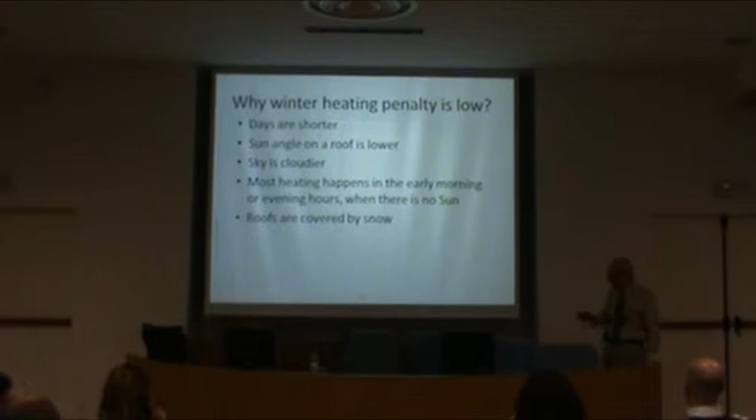So at this time, we are about 5 years ahead in our research. We are now satisfying many communities that cool roofs, white roofs, lend themselves easily to commercial flat buildings that nobody sees the rooftop of anyway, so why not use them? Then we show them some pictures of very high-class buildings that are white and very attractive.

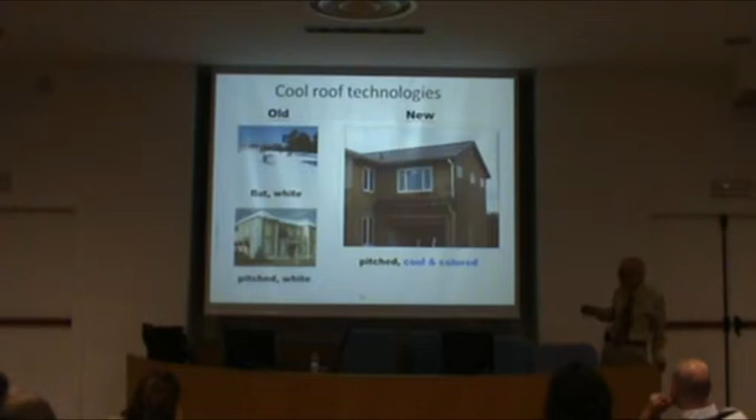Still, people, because of architectural aesthetics, would like to have color on the roof. At that time, we came up with the idea of making cool color roofing materials. This is an example of a cool color roofing material that we installed back in the early 90s and tested the performance. So what is a cool color material?

About 43% is visible. We define color by the performance of these surfaces with respect to this 43%. Over 50% of the sun's energy reaches the Earth's surface in the form of near-infrared that's not visible to the eye, so it doesn't affect the color, we do not recognize it, hence the definition of the cool colors.

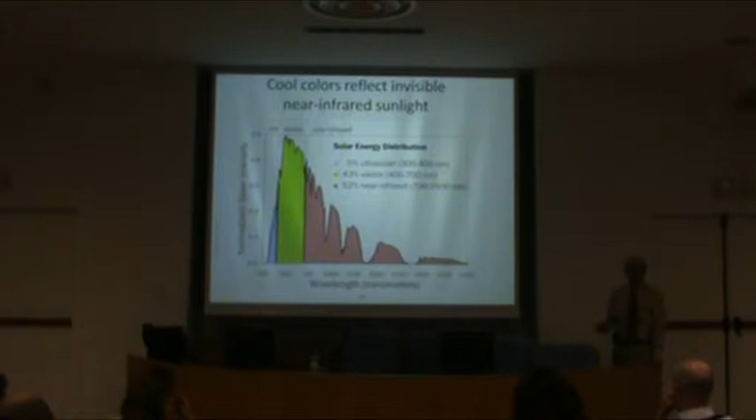So we put a goal for ourselves: let us try, at least in the lab, to develop a jet black surface that has an interface reflectivity of only about 4 to 5% in the visible. You all know that because of the change of density of the air and the surfaces, you have some interface reflectivity, calculated to be about 4% for most diffuse and direct radiation. So the jet black surface absorbs all the visible energy, but we would make this surface 100% reflective in the near infrared.

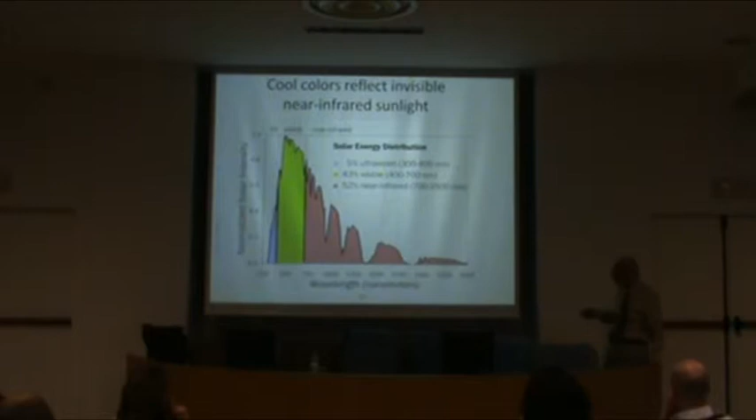Now, by definition, we have defined a jet black surface that has 50% reflectivity. Most current colored materials are not even approaching 20 or 30% reflectivity. Now we are designing a jet black surface with 50% reflectivity. And indeed, this is an example of it.

Two browns designed to have exactly the same colors. When you look at the spectral properties of them, in the visible, as expected, they are identical. But in the near infrared, the one designed to be cool reaches gradually to about 80% reflectivity. The standard one is around 10%.

So on the net, the solar reflectance of this surface is about 8%. This one is 27%. If you put these under the sun during a hot summer day, this surface is going to be 10 degrees Celsius cooler than the other.

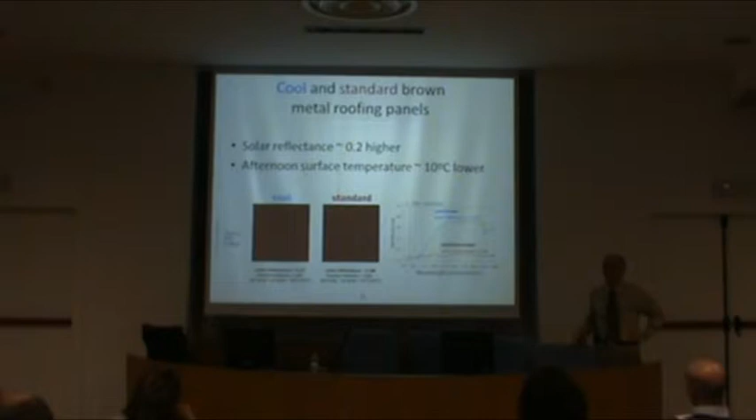And here is the beauty of these things: some manufacturers were using these materials, and we didn't even know that they were using them. So when it comes to black, which is being used in many applications, particularly in Southeast Asia, they have black roofing tiles.

We tested the performance of a particular coloring agent, called dioxazine purple, in very diluted amounts - it is purple, but once the concentration passes about 3%, it becomes black. We applied it on 4 different backgrounds.

One of them was on a metallic aluminum background with a reflectivity of almost 70%. One of them on a very thick white background. One of them on a thin white background. And finally, one of them on a black background.

As you see, the color of all of them is black - they are designed to be that way. And when you look at their spectral performance in the visible, they are identical.

But as soon as they approach the near infrared range, note that the one on an aluminum background stays at high reflectivity, as much as 95%. On a white background, it peaks up to about 90% but gradually drops down. On a thin white background, they peak up to about 70% and then come down.

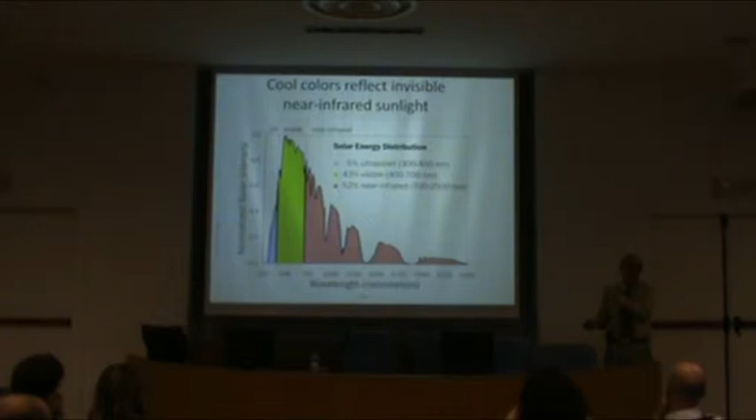Remember, when I was defining this, I said let us design a jet black surface with 50% reflectivity. Now we are having a black surface with 42% reflectivity. So this is a time that most of our group pat themselves on the back saying, good job - so let us go and get more money to do more work.

So then, is this research only being done in the lab? That has not been our motivation in my group when I established it. I basically was saying to myself, mostly to my staff, that our success is not going to come by the number of papers that we write. Our success should be calculated by how many kilowatt hours, how many gigajoules we save. If we do that, then we can consider ourselves good environmentalists, good scientists.

So we have never been interested in doing science in the abstract. We have been trying to reach and bridge the gap between industry and science, bringing products to the market immediately. Initially, the material developers were dubious of our intention - they were very secretive. But as soon as they found out that we are the best friends they can ever have, that we are not asking them for money, just asking them to use this technology to expand their market, we were getting a lot more proposals of marriage than we could ever afford.

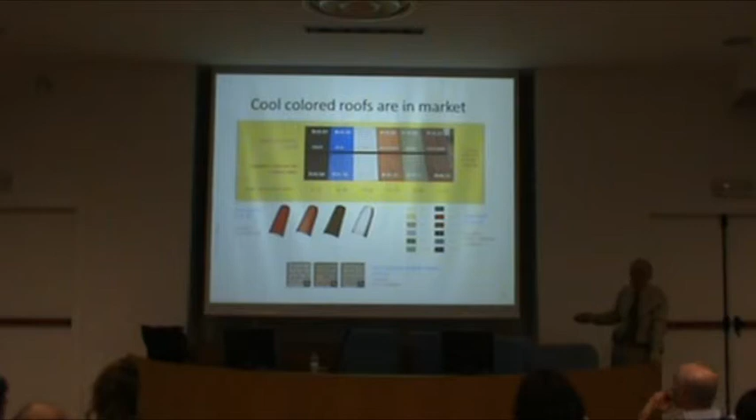Some of you who may be driving or riding a motorcycle know that at the highest speed you need a leather jacket to protect yourself from the wind. But the very first thing you do as soon as you get off the bike is open the zipper because it's so hot out there. Now BMW is manufacturing cool jackets. A little bit expensive, but there's no reason to be expensive because they are only making it unique, and you can also have the arm of the BMW on there, which makes it more interesting.

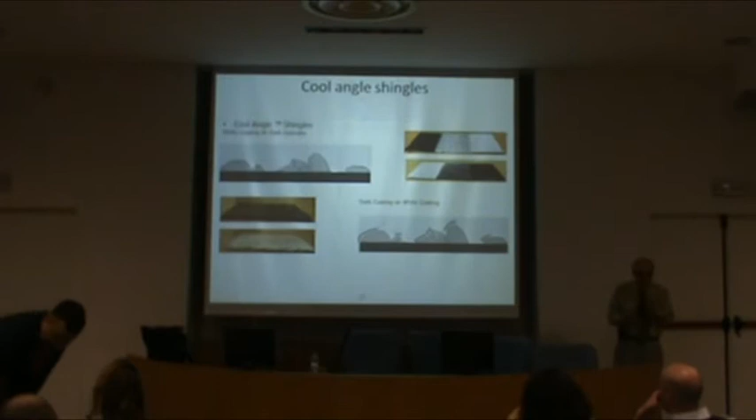More recent technologies coming to market include materials that look dark from the street but reflect the sun. This is called directional reflective roofing material, and these are some examples. These two are exactly the same; one picture is taken from this angle, the other from 180 degrees. So the sun sees this, the street sees this. Therefore your roof is the color you want because it looks like that from the street, but it is a lot more reflective.

The trick behind this kind of technology is to have color pigments only on the directions that are seen from the street, but not on the directions that are not seen from the street.

In addition, there are other products coming, still experimental, thermochromic materials. Thermochromic materials change color with temperature. Most of these materials are organic based, and they lose their potential within a week to no more than 2 months once they're under the sun. So making it inexpensive so that people can use it on the roof is a big challenge.

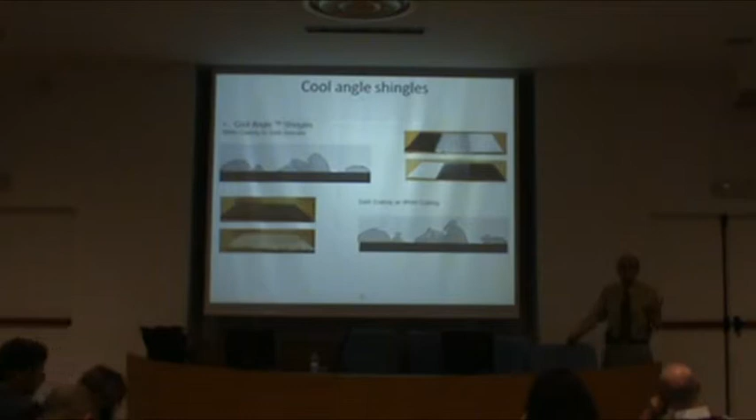Another material that my colleagues in Perugia and other colleagues in Japan are working on is retroreflective material. This retroreflective material, like the reflectors on your cars, reflects in the direction that the light comes from, so it reflects most of the radiation back in the direction of the sun, while from the street level it shows a darker color.

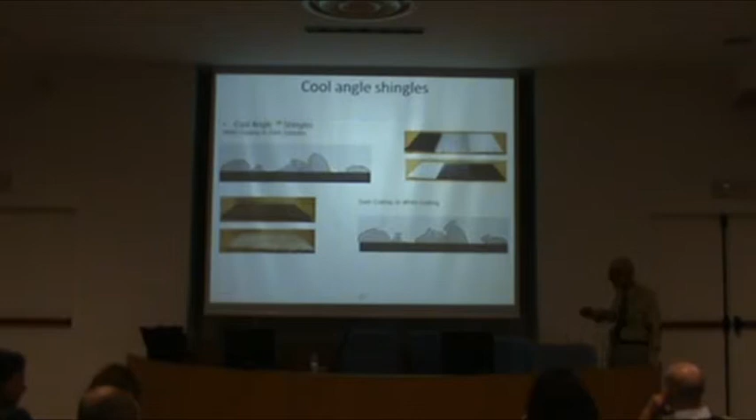Another technology being used is corrugated metals. By the way, these are already available in the market, having come in within the last 2 or 3 years, and we are proud to be part of this evolution. In this design, the vertical part of the corrugation, put at an angle on the roof, is seen from the street, while the horizontal part is seen by the sun. So they are a lot more reflective in the direction of the sun.

So at this point, we have said okay, we are about solving 25% of the urban surfaces. What about pavements? Pavements are a lot more difficult to address for several reasons. Number one, asphalt is a byproduct of the refining process.

Asphalt is a residual of refining, something that refineries have to get rid of. Of course, it does have some good quality, as many residuals do. They found a way to stabilize it and mix it with granules to make all our pavements. Therefore, the pavements installed throughout the 20th century are all asphalt pavement. And no wonder they are

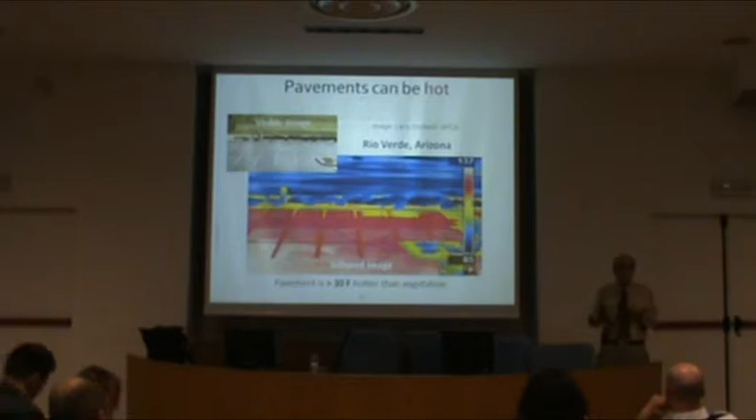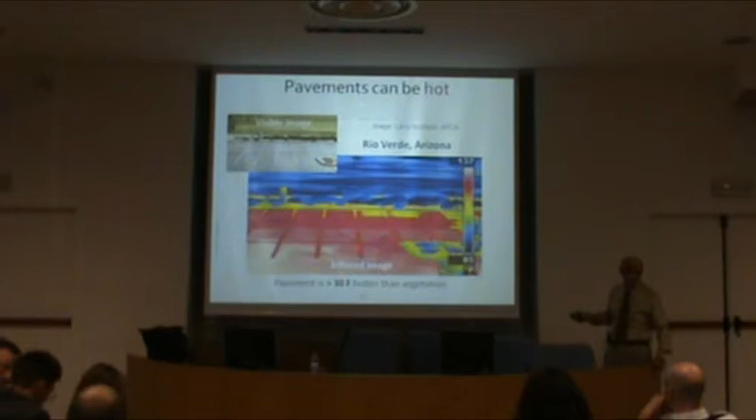Here is an example of a visible picture of an area that includes some grass and some asphalt pavement, with a thermal infrared image. As you see, the temperature difference is something like at least about 50 degrees Fahrenheit, about 30 degrees Celsius. So when the air brushes on the surface, obviously it's going to get heated and it creates a heat island.

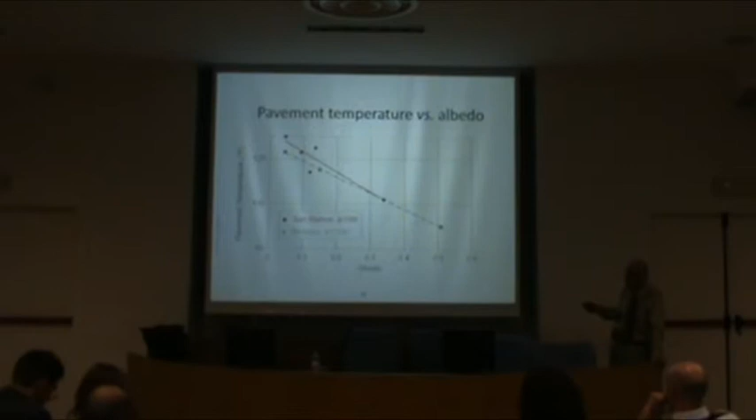So we have been developing some simplified measurement techniques in order to look at the performance of the asphalt. Obviously, the reflectivity of the asphalt would reduce the temperature of the asphalt under steady state conditions.

Principal types of pavements - this is an interesting thing - the word concrete is used both for asphalt and also cement. But when we say asphalt concrete, we are using asphalt. When we say cement concrete, we are using the word concrete. So the correct way is asphalt concrete versus cement concrete.

Many parts of the world are finding out that it is much cheaper to use cement concrete, because of its durability and low maintenance for a longer period of time.

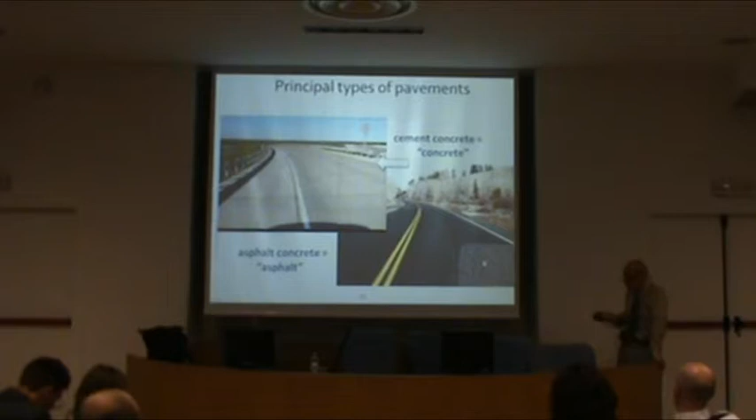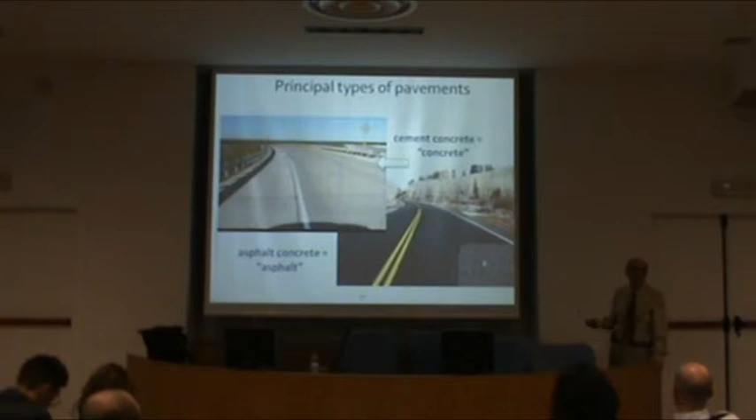There is also another factor that makes this industry very fragmented, very hard to achieve or to make contact with. Asphalt is being applied in many different applications, and each has a different ownership, different policies are required - parking lots, alleys, driveways, bridges, plazas, playgrounds, streets, roads, highways, sidewalks, runways. So airports are in charge of the runways.

You have to reach different crowds in order to convince them to use reflective material. Streets, roads and highways are under the control of the city, municipality, and sometimes the state, sometimes the federal government. So with all of that, it is kind of hard to achieve different progress.

But the technologies that we have reviewed, and I'm going to review this in detail tomorrow, cover a technology called chip seal. Chip seal is, rather than mixing the aggregates with asphalt and then laying them on the ground, we pour the asphalt first, then put the granules on top of it and roll it in. Therefore, if you have a reflective granule, you can immediately have a reflective surface.

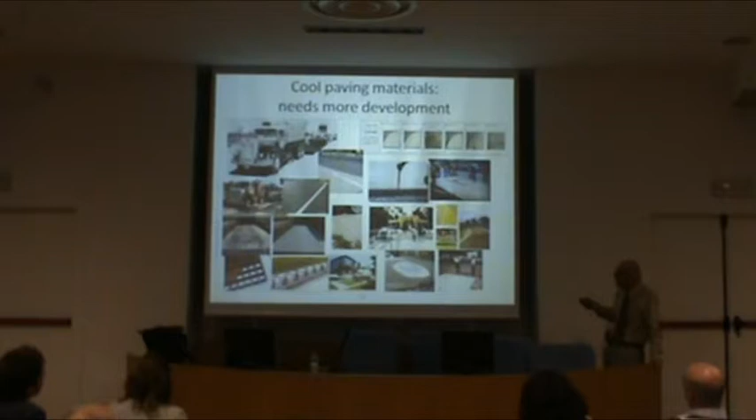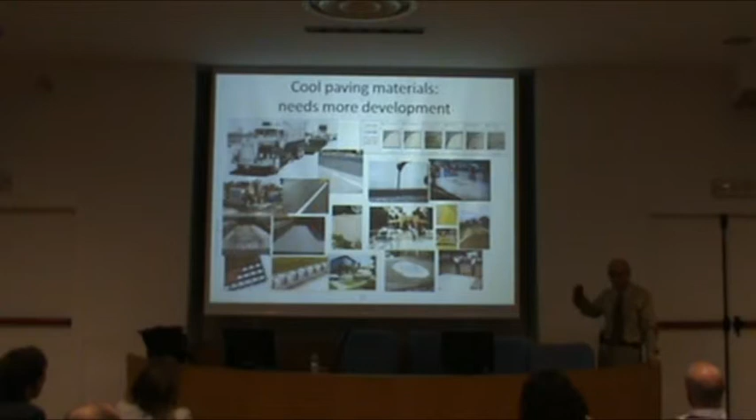You can, of course, use light color concrete. You can use coatings. You can use grasscrete - I saw in several driveways here that parking lots are made from concrete blocks. These concrete blocks can support vegetation growing out of them, and they make these things pretty cool. And then on top of that, you can use colored material as well as porous surfaces in order to keep water flooding under control with this technology.

There have been several studies going on, and my colleagues in Japan, like Rossi and Moriyama-san, have been doing measurements of a sample of different pavement materials, looking at their infrared pictures at one time during the day, and following up their temperatures to identify which one applies for where and when.

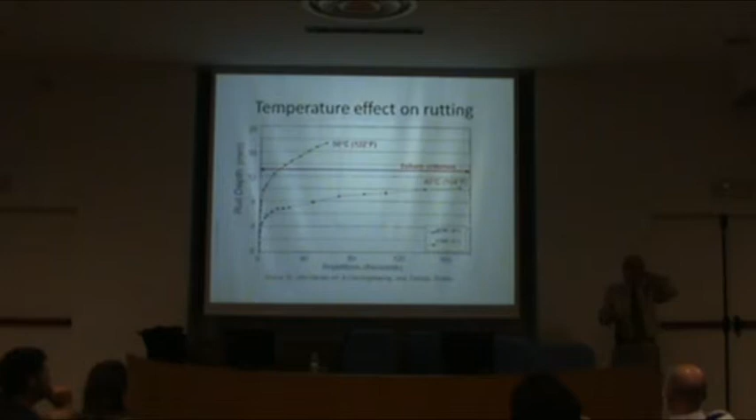Now we have also been studying the benefits of vegetation, and I'll show just a couple of slides on this major area of research. We conducted an experiment where we took large trees from two identical houses, brought them to one house, continued monitoring their performance, then brought a crane and moved them after a month to the next building, continuing to monitor performance. We documented shading savings of as much as 15 to 20% in cooling energy use.

Evaporative cooling: trees, through evapotranspiration and photosynthesis, convert some of the sensible heat into latent heat. It doesn't actually cool the environment a little bit — it doesn't allow the environment to get heated as much. Like steam, it still heats the environment, but compared to the case with no evaporation, it will be heated much less.

Trees are also used in both hot and cold climates for wind shielding. In hot climates, to protect the building from hot wind in a specified direction. In cold climates, particularly from the northern wind, evergreens help. So this is another benefit.

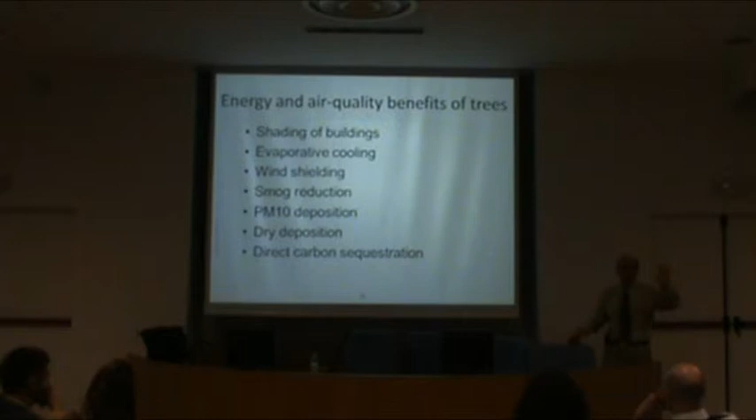Smog reduction: trees, not just by reducing urban air temperature, can also reduce urban smog by about 50%, with the other 50% coming from other benefits. Tree leaves act as a good filter. Particulates harmful to people, particularly large particulates of 10 microns or smaller, get deposited on the tree leaf, and because the leaf is slightly moist, it attracts them so they aren't moved by the wind. When rain comes, it washes them to the ground where they belong.

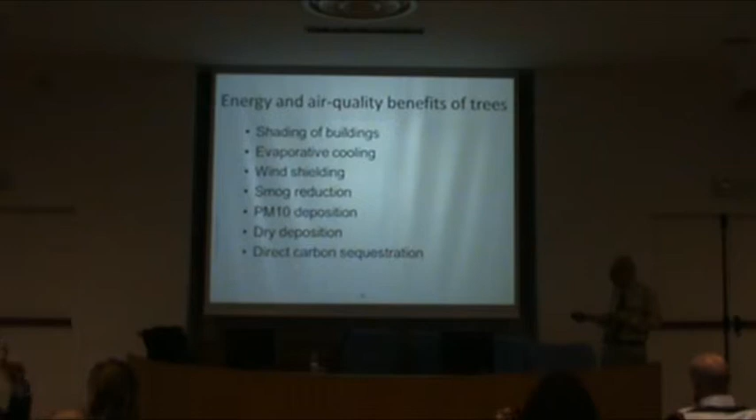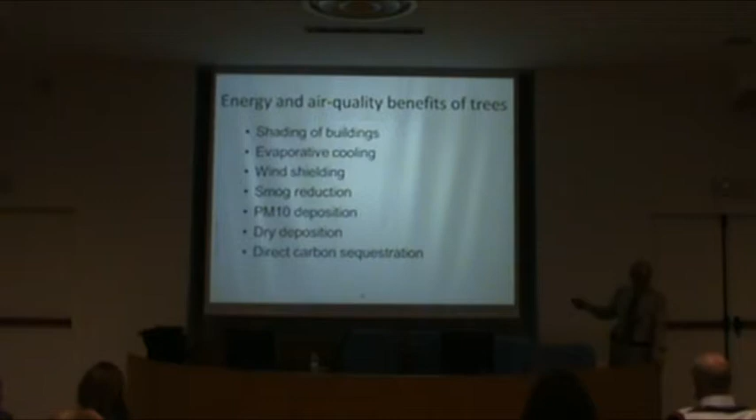Dry deposition is also a factor: through photosynthesis, trees convert some ozone into oxygen. And finally, trees, as we all know particularly in this lab, sequester some CO2 from the atmosphere through biomass growth. The energy savings from trees, due to shading and reducing CO2 emissions from the biomass that would generate that electricity, is 10 times larger than the direct sequestration.

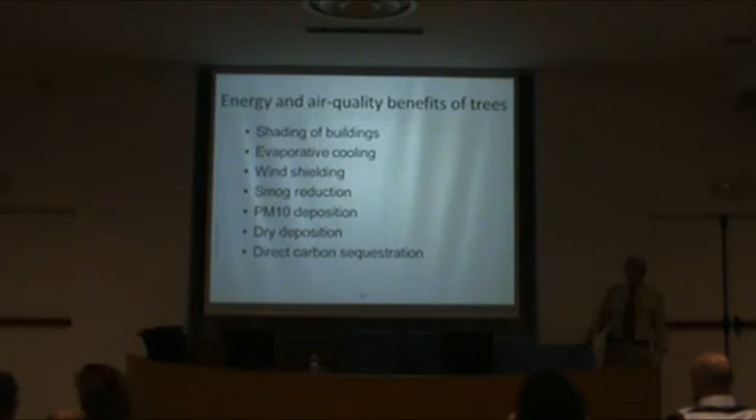So, something to consider. Other measures we've constantly been working on in this integrated research include roof gardens. I'm not a big fan of them because of the economics, not their effectiveness. A roof garden is typically 4 to 5 times more expensive than a typical roof, and you cannot justify that additional cost through energy savings. Green walls are an old technology that's used a lot in Europe.

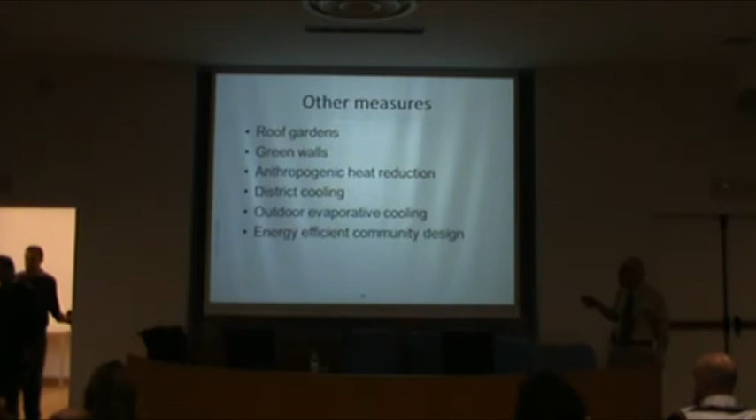Anthropogenic heat reduction, district cooling for cooling urban heat islands, and outdoor evaporative cooling.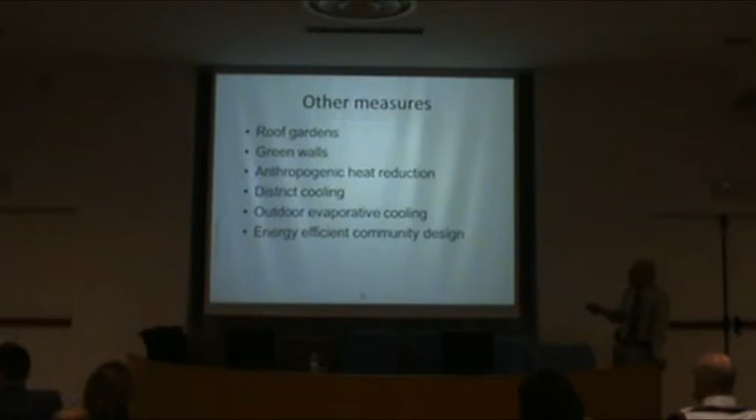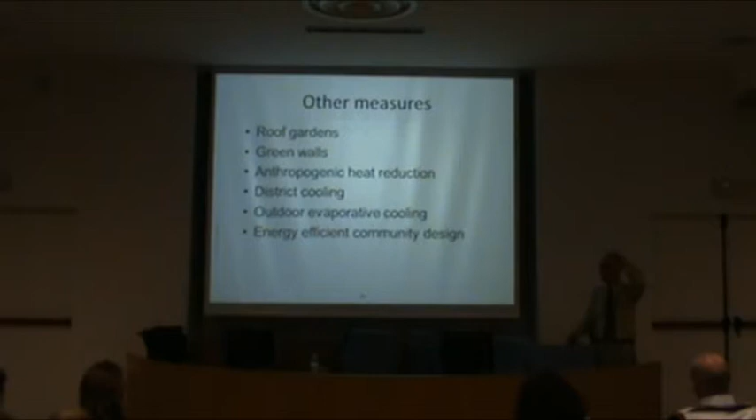This technology was used, I think, at the 1992 Barcelona Olympics in Spain. They used evaporative cooling, with a small mist coming on the pathways, creating local cooling for the comfort of the people.

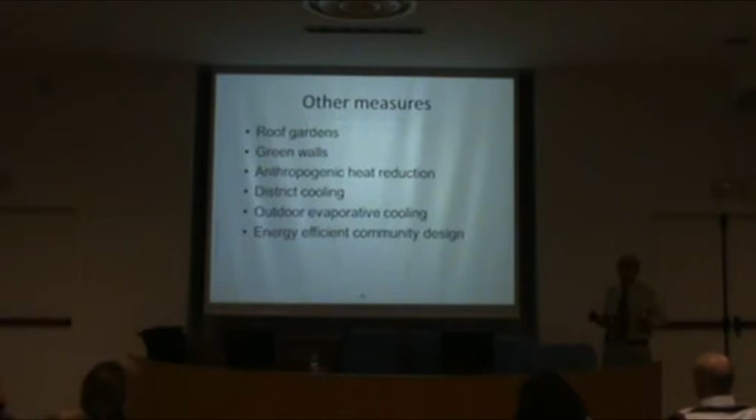And of course, energy efficient community design is becoming more and more the sexy word of the research—zero community designs, net zero design—looking at how to convert our communities today, which are not very efficient, into energy efficient communities 50 years from now. You cannot demolish all the buildings and build new facilities; you have to do it in a controlled way.

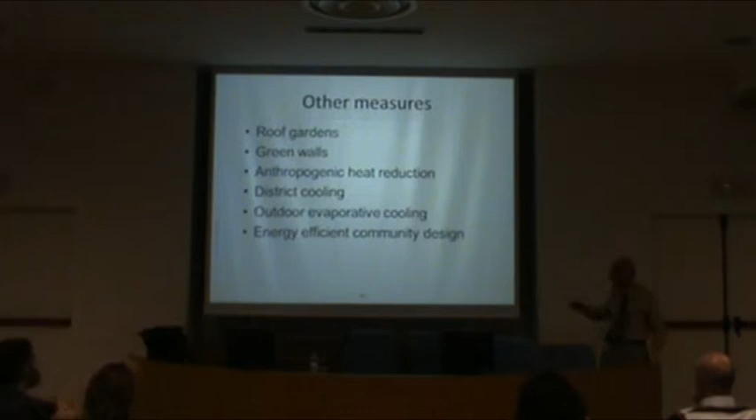So let me talk a little bit about the roof garden. This is an example of some roof gardens being applied, in the Chicago area. This was taken at the time the roof garden was established. A year after that, it was all dry and not attended to.

Because of the increment, this costs about $20 a square foot versus a typical roof which costs $3 a square foot. This requires annual maintenance, depending on the facility, of at least $1 per square foot per year. A typical cool roof doesn't have that, and so on and so forth.

Having said all of that, I spend a lot of money in my own garden in order to enjoy it. But I do not justify it because it is energy efficient—I justify it because that's my style of living.

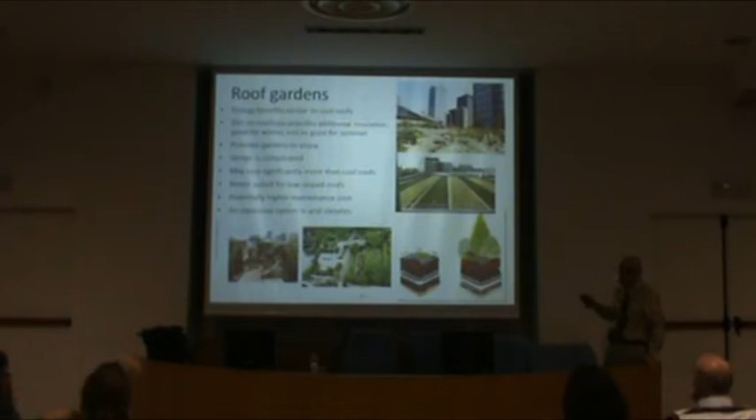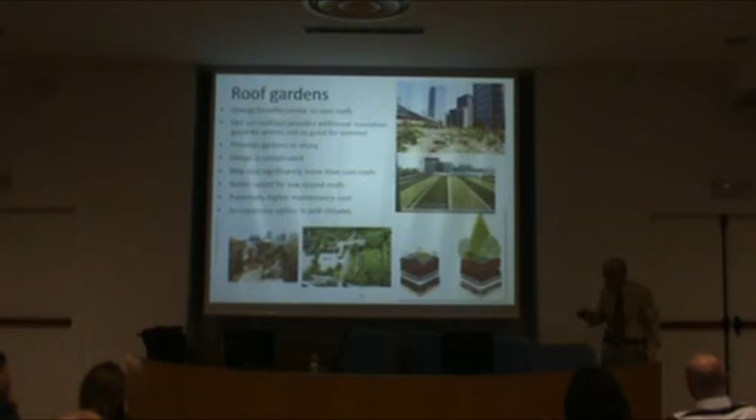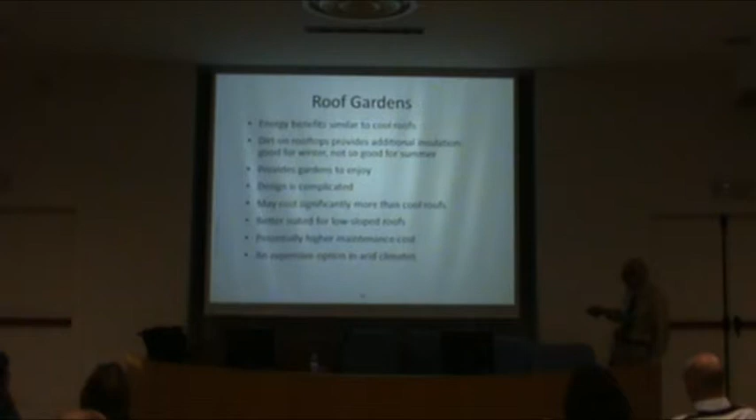In some places, such as downtown areas in New York, where green spaces are not really abundant, having a roof garden for people to go and enjoy a comfortable lunch increases productivity significantly. So that is the issue to think about: it may cost significantly more than a cool roof, with higher maintenance costs—an expensive option in climates where water is scarce.

So now, opening another Pandora's box, this time looking at air quality—the air quality of urban areas, which we are going to discuss. I'm proud to say we are organizing a conference next October in Venice, and about 50% of our papers are focusing on this.

If you have a cool surface that reflects more incoming radiation, it keeps the surface cooler, air temperature cooler, and ozone production slower—you have less ozone. If cooler surfaces reduce your energy consumption, that also reduces emissions, so ozone will be lower. At the same time, cool surfaces make the boundary layer thinner during summer. If the boundary layer is thinner, the smog mixed into that thinner boundary layer can have higher concentration. So this is a negative cycle.

One has to really understand all these things. If you have a lot of vegetation, vegetation has emissions you have to account for, and dry deposition. Vegetation affects the roughness of the surface, which changes the velocity field, and the velocity field moves pollutants differently. Vegetation also has evapotranspiration that cools the air, and its reflectivity may be higher than asphalt, while also lowering surface temperature.

So looking at this whole thing is a big project. The tools we have been using have constantly moved to stronger tools. We initially started with the CSUM model, Colorado State University Mesoscale Model, then migrated to MM5. Nowadays my students use WRF, Weather Research and Forecasting model. There are some specialized models, such as the San Jose State model, developed by its author and a couple of affiliates. ENVI-met does a very thorough energy balance for a neighborhood at the canyon level, building by building, so it's also being used significantly.

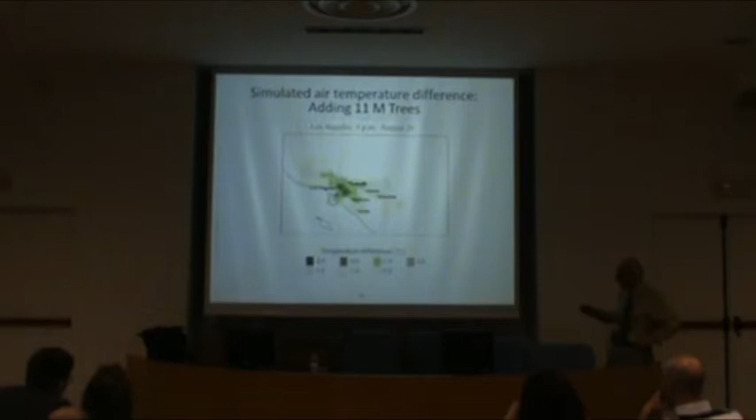The pixel size are about 5 kilometers each. We planted 3 trees per house, one on the west side of the house, 2 on the southern part of the house, depending on the density of the houses. So we had different tree plantation scenarios, and we came up with a total temperature reduction anywhere from half a degree Celsius to about 3.5 degrees Celsius. Remember that the areas with the most population of trees have a larger temperature drop.

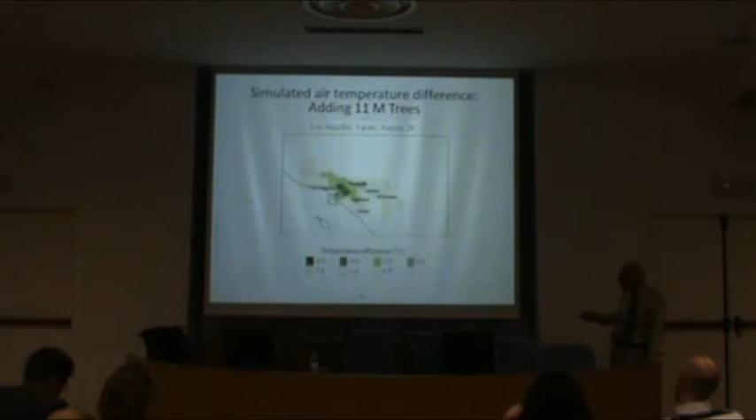Then we compared the effect of this on the air quality, and this is the cooling of the Los Angeles basin, and this is reduction in the smog formation. In some areas, the reduction in smog formation is something like 30 to 40 parts per billion.

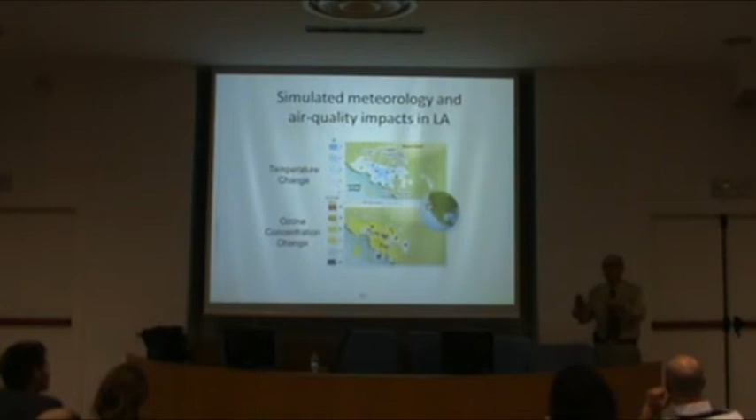Some of you may not have an appreciation for this. There is an organization in Southern California called the South Coast Air Quality Management District. They would give their arm and shoulder for one single measure that can produce a 1 part per billion reduction in ozone formation. They follow everything: emissions from all the stationary sources, the emission from your gas burner inside your home, the emission from the gas cooktop, the emissions from dry cleaning, which use a lot of VOCs. So everything that they do, if they are 100% successful, would only reduce this by 10 parts per billion.

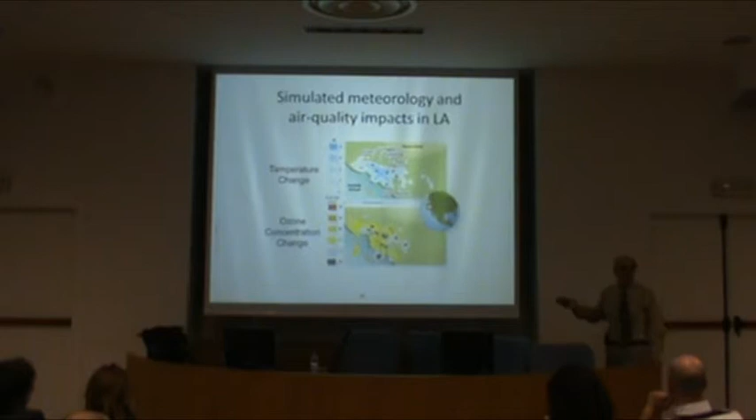Now we have here one single measure that can potentially improve air quality on average by about 20 parts per billion. So this questions the entire validity of that organization, because everything that they've accomplished is peanuts compared to what we can achieve here.

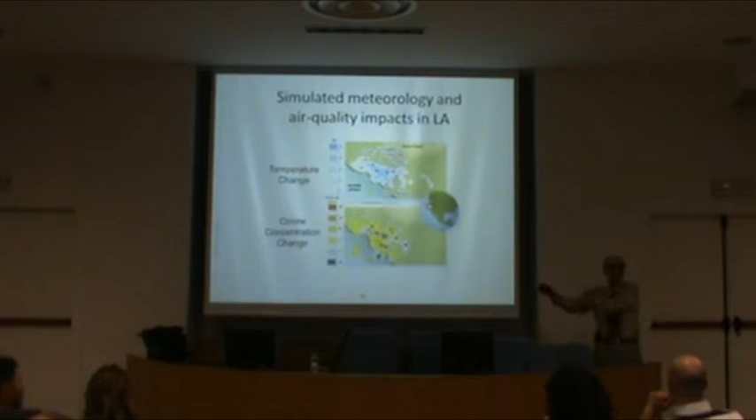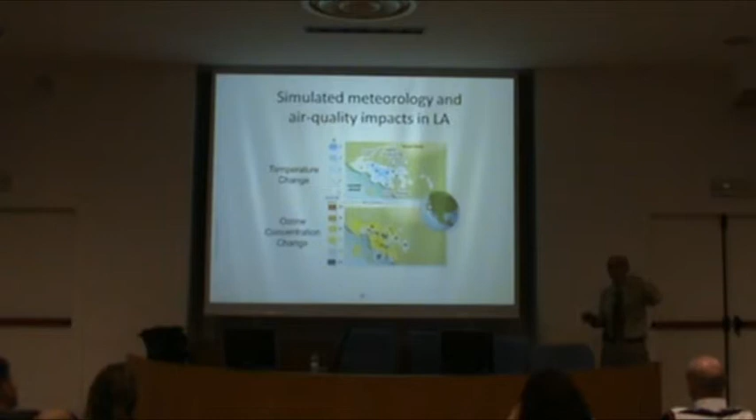They said, okay, that's good, we would do this for everything. So this is a measure that everybody should do, therefore they made this their base. So that is our role: coming in and talking to the leadership, the policymakers and decision makers, to adopt these policies. Because without that, you would not have much of an effect.

Today, with my friends Professor Rossi and Professor Federico, we were talking about how to encourage the politicians and policymakers in Europe to get more engaged, and I was just telling them of some of this experience.

Now, here is the last part of the science and application, the part that I did not show in the overall chart: it is the global cooling aspect, which I call geoengineering 101. If you have cool roofs and cool pavements, that would save energy at about $50 billion throughout the world if fully implemented, per year.

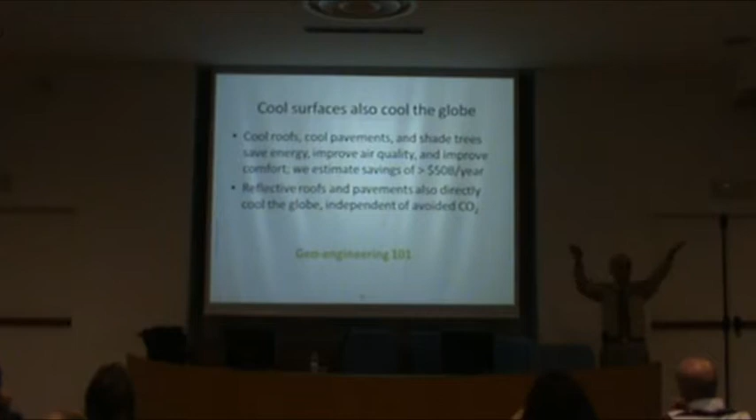Now, if you have cool roofs and cool pavements, that would reflect some of the solar radiation back to space, and in a way counter global warming. This is known as radiative forcing, and this particular type is known as negative radiative forcing.

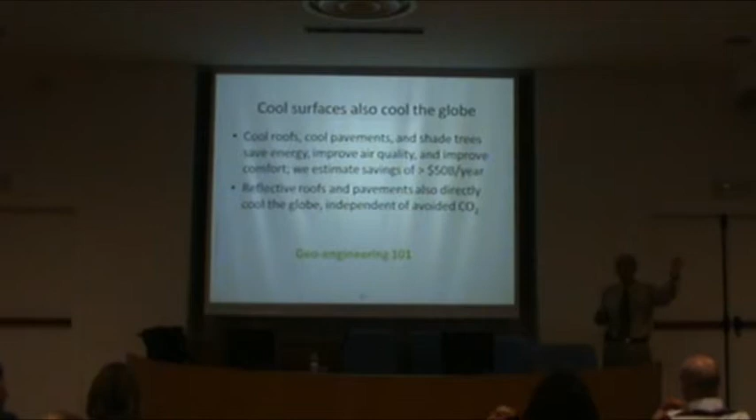As you know, by melting the snow caps on the earth, we are changing the reflectivity of part of the earth from 80% to 5%, and that accelerates the melting of the snow. As you know, the snow cap on Greenland has been reduced by something like about 30% within the last 20 years.

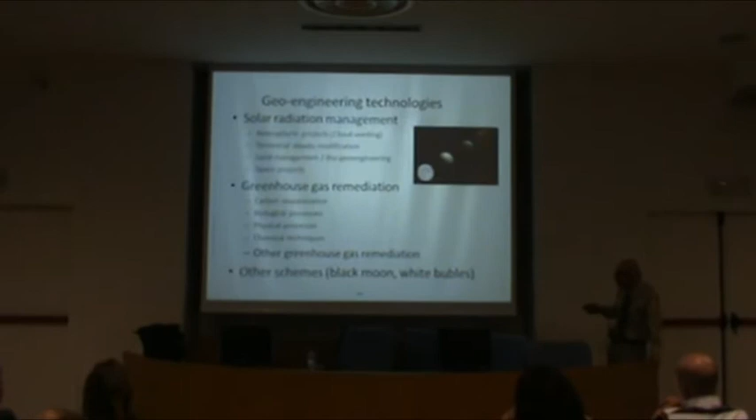So what is typical geoengineering? They're working on 2 basic technologies. One of them they call solar radiation management, the other is greenhouse gas remediation. Solar radiation management includes a lot, but the most popular is seeding the atmosphere with sulfate gases and particulates, which would increase the reflectivity of the atmosphere by increasing the clouds a little bit.

Such a thing, we may end up taking as a drastic measure under drastic conditions. If we really come to the conclusion that if we don't do things now, 20 years from now half of the population of the world cannot live anymore, we may come to that decision. But this is something we haven't tried at a larger scale, and we do not know the consequences. But we have installed cool roofs for thousands of years in the Mediterranean and Middle East, and we do not know of any negative aspects of it, and we continue doing that. So that's the reason we call it geoengineering 101.

There have also been some crazy ideas, like bombarding the moon with black paint, so that would make the moon dark, so the reflected radiation from the moon onto the Earth is very small.

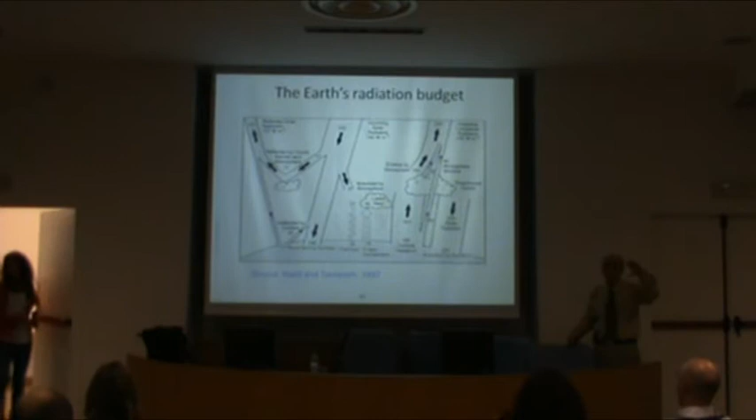So suppose we all know that land is about 29% of the surface of the globe. Cities, depending on how they're defined, cover anywhere between 2 to 4% of the dry land. So we are suggesting to increase the albedo of 1% of the cities located between plus or minus 45 degrees latitude by a modest net 10%. And I'm going to explain what that means.

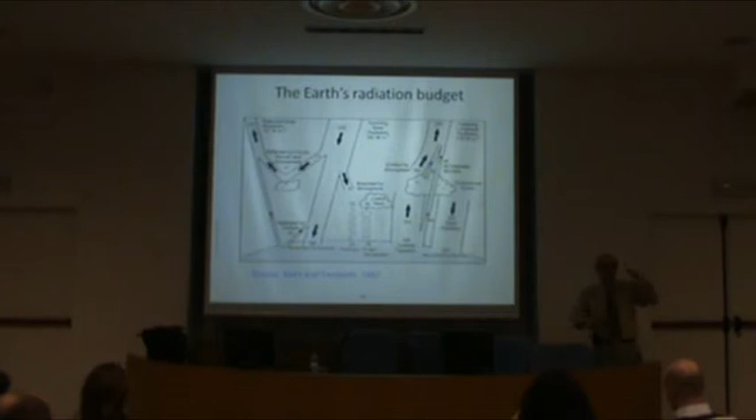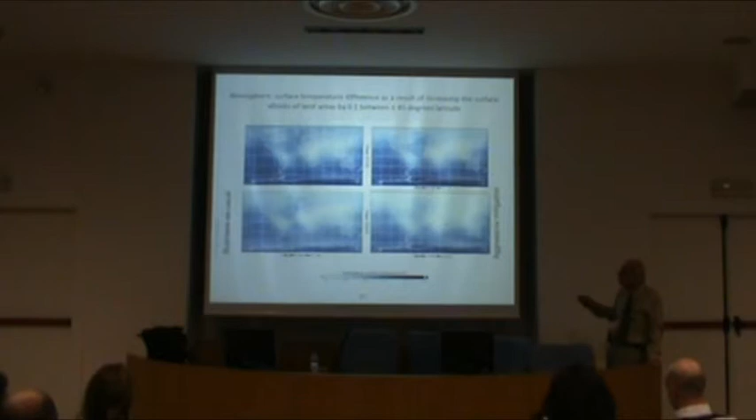So we did some simulations, and the simulation indeed proved that if we increase the reflectivity by 0.1 - a 0.1 reflectivity increase - we get a significant effect on temperature. Our analysis was done on the long-term performance of the surface, and we ran simulations for almost 1,000 years.

But here, we are only summarizing about 300 years. We followed several base cases, and then increased the albedo of the dry land between plus or minus 20 degrees latitude, and plus or minus 45 degrees latitude. As you see, if you have a higher increase of the land area, the temperature drops, and then it eventually goes back. This is business as usual.

Growth of the greenhouse gases - now if you look at the temperature, you'd find it goes and levels out at this level for the base case, and this is for aggressive greenhouse gas reduction, and then the increase of albedo would significantly lower the temperature.

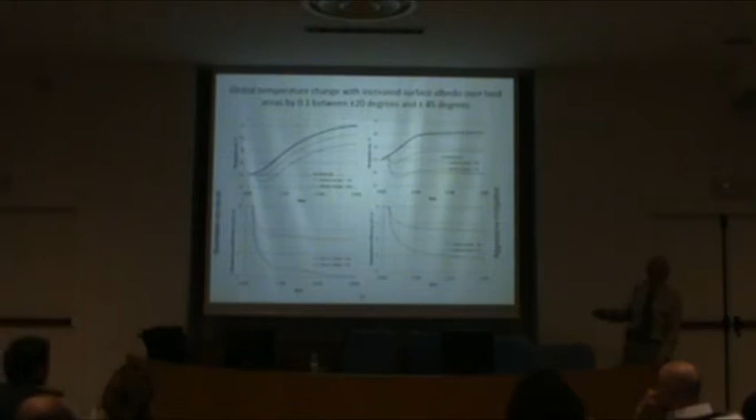Now, if you look at the temperature difference between the base case and the albedo modification, you'd find about a 3 degree Celsius reduction between plus or minus 45 latitude, and about a 1.5 degree reduction in the Earth's atmosphere overall. Finally, when you make this equivalent to CO2 emissions, you'd find that increasing the albedo over 1 meter square of land by a 0.01 change in albedo offsets about 7 kilograms of CO2.

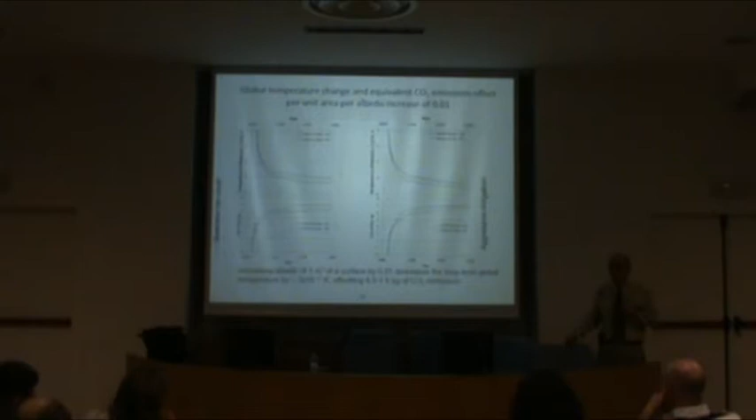So now, suppose that I have a roof. This number is now in use around the world more and more. I have a roof whose reflectivity is 20%, and I increase it to 60%. So the change in reflectivity is 0.4. I multiply that 0.4 by 7 kilograms, because for every 0.01 increase we get 7 kilograms offset. So multiplying by the 7 kilograms, you get 280 kilograms of CO2 offset for every square meter of the roof. And if your roof happens to be 100 square meters, you multiply 100 square meters by 280, you get 28 tons of CO2 reduction in the atmosphere.

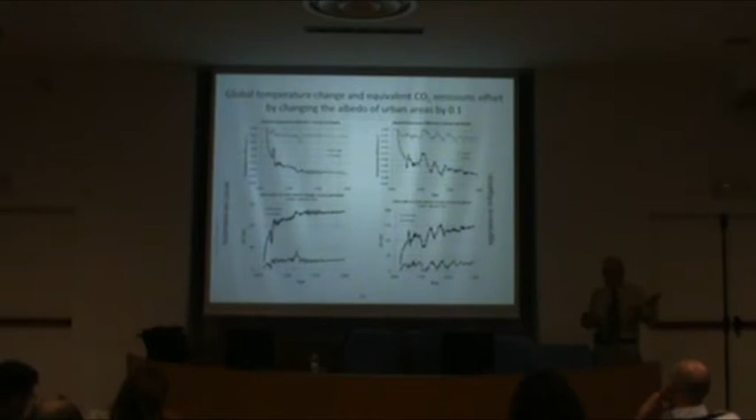We then continued that same analysis, only changing it to urban areas, and we came up with this number: if you do this only for urban areas, you have a potential to offset approximately 130 gigatons of CO2. Again, that's a large number, and you would not have a feeling for it. Let me put some feeling to it. So this is how we get to those numbers first.

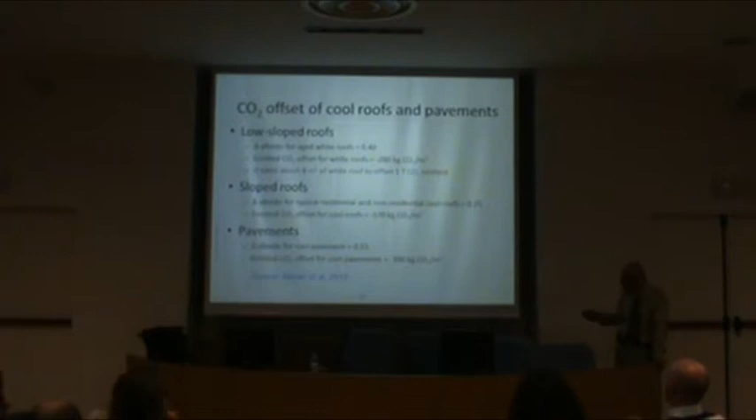For flat roofs, we increase the reflectivity by 0.4. For a sloped roof, we increase the reflectivity by 0.25. For pavements, you go from the dark color of dark asphalt to the color of dark concrete. Put it all together, you would come up with a total reduction of about 120 gigatons of CO2. These estimates have changed throughout time - initially started with 44 gigatons, now they have gone up to about 150 gigatons - equivalent to 1 to 4 years of all emissions from all over the world.

Now we are starting to talk numbers. If you think about the growth of emissions, installing cool roofs and cool pavements can basically keep the world stable for the next 11 to 25 years. Guess what - how many years would it take to install cool roofs if you go in the natural cycle of changing the roof every 20 years? If you start the program right now, 5% of the roofs come to be changed every time in the natural cycle. In about 20 years, you have reached your limit.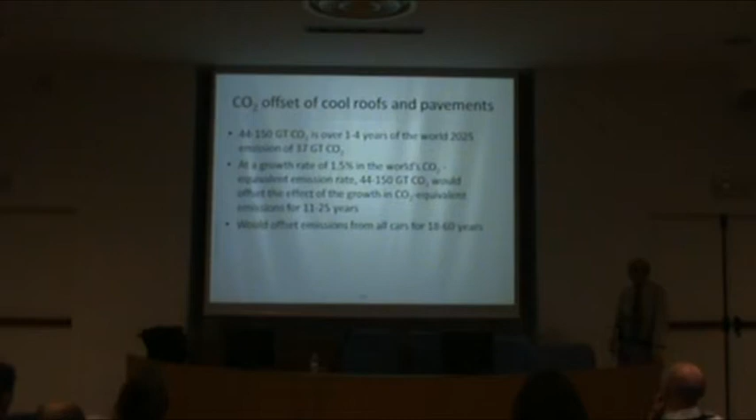Another way to look at it: this is equivalent to offsetting all the cars in the world for the next 20 to 60 years. Money-wise, currently in Europe each ton of CO2 is traded at $25. So when you put those numbers together, it is equivalent to $1 to $3.5 trillion. The amount of money the world spent to get out of the deep recession within the last 5 years has been only $1 trillion. So this is equivalent to 4 of the global recessions. So you can afford it.

And on top of that, if you install a cool roof, it keeps on reducing your air conditioning bill as long as you keep it cool.

This has attracted a lot of attention throughout the world, and we have had stories about this on many reports on TV and in newspapers. I remember there were several Italian ones. Do I have an Italian in here? Yeah, correct - but there were more than that. At one time I counted there were about 1,000 different stories being told.

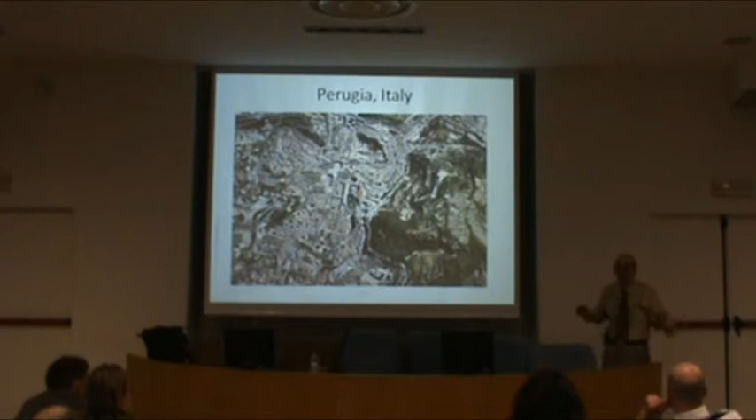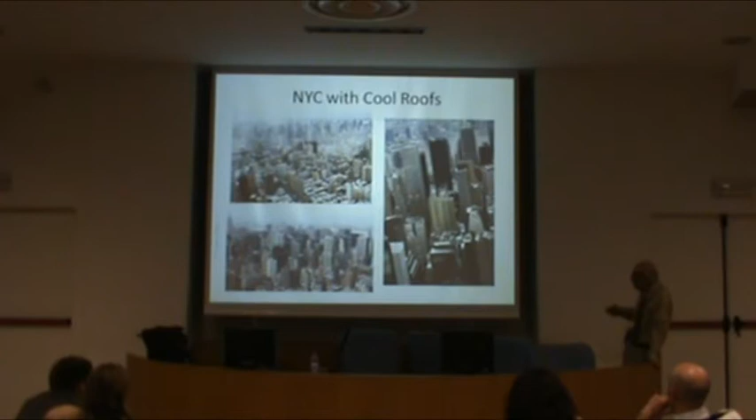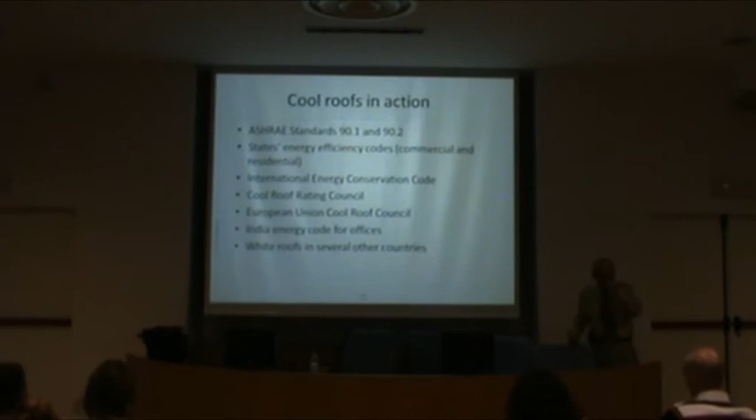It was very much the case that—I'm opening another side door and letting you have a peek inside—people would come in saying this roof has 120% reflectivity. For an average person who doesn't understand that reflectivity ranges from 0 to 100%, this is not understandable. They can easily be deceived.

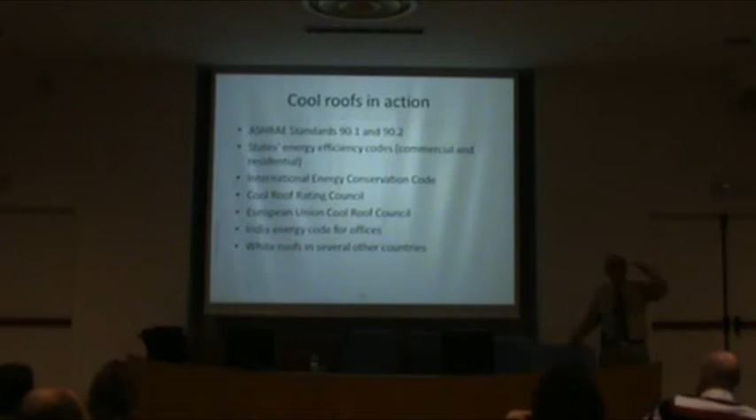So 20-odd years ago, I started an organization called the Cool Roof Rating Council, which measures the reflectivity and emissivity of materials and labels them, so manufacturers know that from a point of authority, they have all this information.

Later on, working with European colleagues, we started the same thing in Europe. India has also done the same thing. Many other countries, particularly in the Middle East, are also following suit.

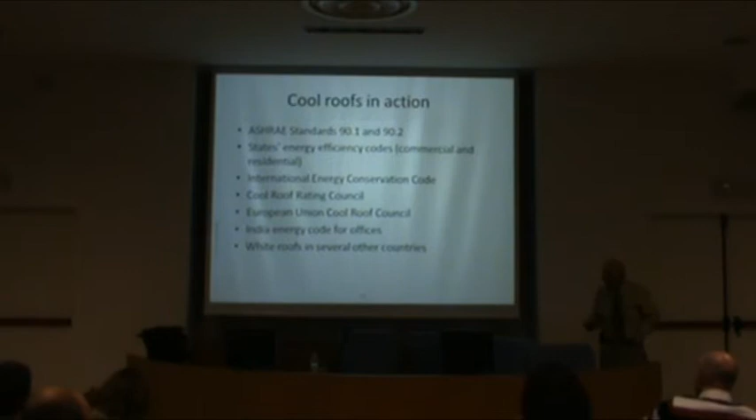So everything that I've said here, if you want to forget everything, you are not allowed to forget this one: if you change your roof from a dark roof to a white roof, you offset 10 to 20 tons of CO2 emissions.

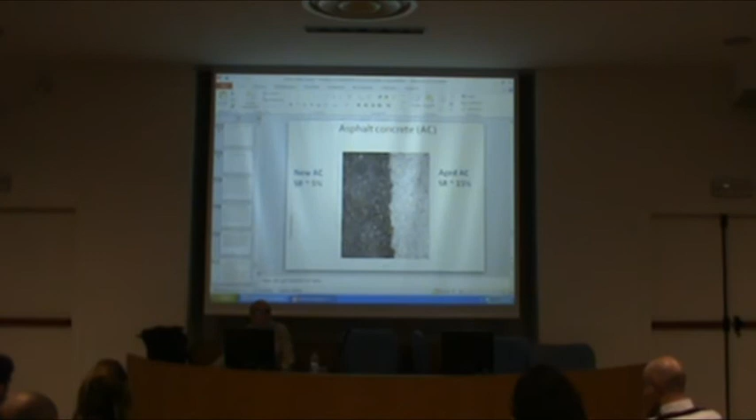Yeah, since I'm trying to reduce my presentation time, the idea you mentioned comes into some basic ideas. First of all, you have to enforce this thing throughout time. If you are talking about energy savings, if you have a cool roof, and next day you start putting a dark roof, your energy bill goes up. We are relying on the brain of the consumer.

If we tell the consumer and society that the annual cost savings is in the order of $0.50 to $1 per meter square, and the annual CO2 savings is a certain amount, and the net present savings throughout 20 years of your roof is $7.5 to $15 per meter square, and the maximum incremental cost you pay for a cool roof - in most cases it doesn't cost you any more, in some cases it may cost you less - then eventually we have given enough ammunition to a conscientious customer to make the decision.

Okay? Therefore, this is a no-brainer. But like any other thing, we all know that some cars run on 5 liters for every 100 kilometers, and some large cars run on 5 liters every 5 kilometers. So when we are living in society, we are living by the rules. We are no longer accepting individuality as the only factor. Your freedom to move your arm stops when my nose starts. Your freedom to pollute stops when my health is an issue. And we control those things at the societal level.